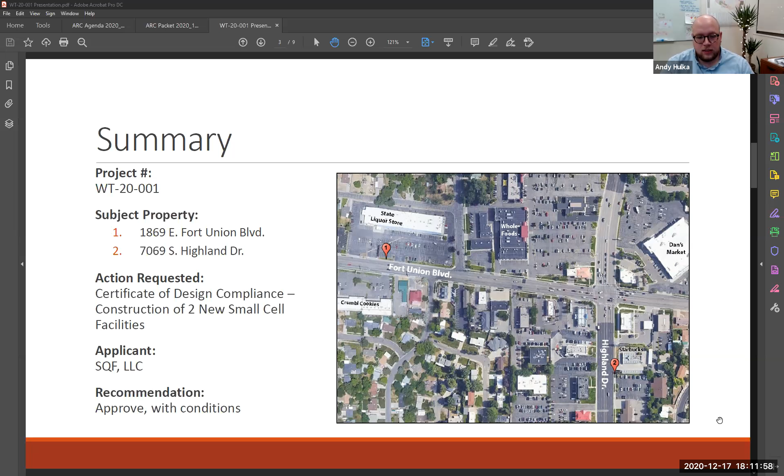To remind you the discussion that we had from last month, these are my notes. Comments were first for staff to review the potential for a small cell and streetlight master plan. That is something that we added to our project list, something that I do think is a great suggestion and something that we need to work on, so we will be proceeding with that. Unfortunately, though, the applications that we've already received before adopting any sort of master plan, we can't hold them to a future plan, but it is something that we do want to work on for all future applications, and we will keep you posted as we do that.

The suggestions that were made by the commission for this application were for the applicant to explore feasibility of redesigning the facilities with a few suggestions: one, to add a decorative base to match the city streetlights; to add a fluted element to the pole; to add an additional light fixture over the sidewalk; and then to include equipment inside the pole rather than outside wherever possible.

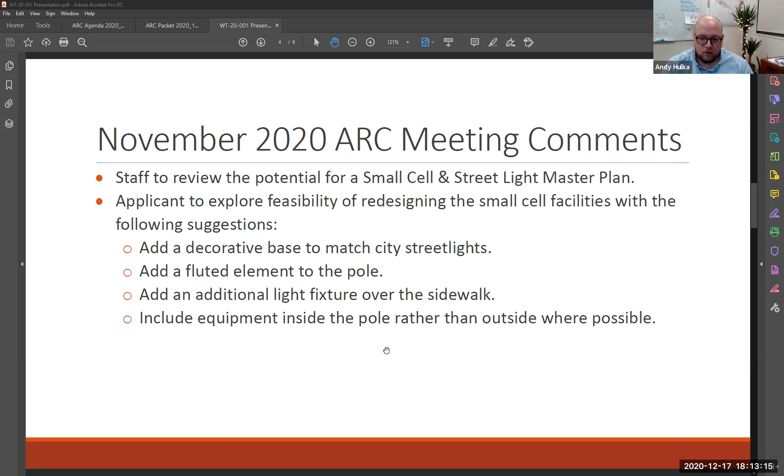So since the last meeting, we've got the two locations. So the first one, 1869 East Fort Union. This one is located behind the sidewalk, so it's just got the one light fixture. There's the comment that the second light fixture doesn't apply in this location, but as you can see, I've tried to highlight the changes that are proposed. So the red circles show what was previously shown on the plans as future antennas. Those have been removed. You can see that that shows a kind of a sleeker pole.

And then in green on the December design, you can see that they've added a decorative base. They are working with our streetlight manufacturers to get one that matches the specs of our current streetlights and get the city logo on it. And then moving to the other location, 7069 South Highland, right out in front of the new Starbucks building. This one, as you can see in red, also some of that additional equipment that was previously shown has been removed. And in the new design, we have a secondary light fixture so that there's one over the street and one over the sidewalk, and then the base again.

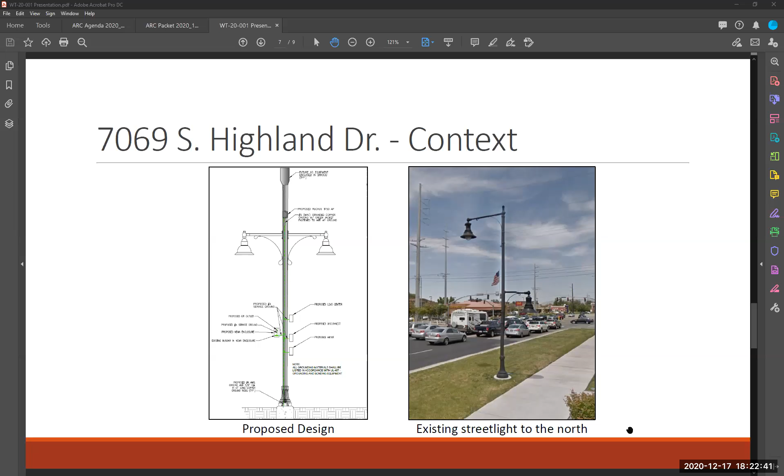I think Andy did a good job summarizing some of the revisions we've made to the project. We added the light to both. Well, we added the second light to this one here at 7069, and then we added the light also on the one on East Fort Union Boulevard.

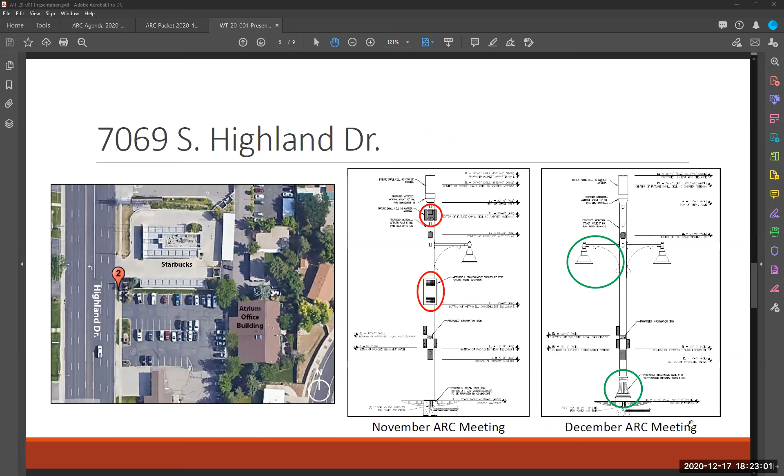Now, why is it better not to have two lights on the other one? Why are we not proposing two on the other one? Is that the question? Yeah. Because the second light is for the sidewalk. So when you're in the parking strip between the street and the sidewalk, it makes sense to have two lights, one for the street, one for the sidewalk. The pole we're proposing on East Fort Union Boulevard has no parking strips, so one light is all you need to get both the sidewalk and the street.

So we're working with Mountain States Lighting on that pole base. I think we have a design, and I sent Andy a PDF showing their Madison base. It's on one of those slides, right? The green one. Yeah, so we'll be able to include that into the design.

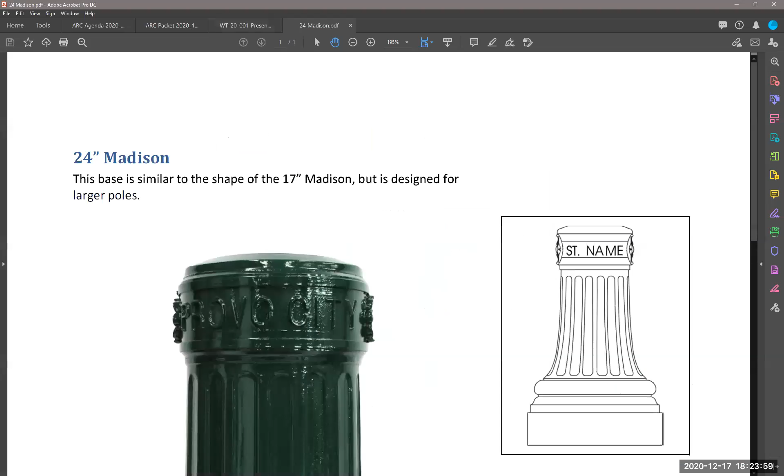And then we removed the future 5G antennas and radio equipment shrouds. Originally we wanted to show that stuff because we're proposing this pole be built to accommodate future co-locators on there, to reduce the total need for new poles in the right of way. But it's become apparent that a future co-locator would need to go back to you guys. So instead of showing some hypothetical antennas and radio equipment shrouds here, we just removed that, and those additions would come to you guys at a later date to review that design, similar to how Extenet had done it at last month's meeting.

Now the pole remains the same. We discussed integrating the equipment within the pole. That would result in a much wider pole. In order to fit the stuff inside the pole, it gets out to 12 inches at least in width, so it becomes a much beefier looking pole to hide everything inside.

It was kind of what I was hearing from you guys at the previous meeting, that you wanted it to look more similar to your street light poles, the decorative street light poles. So we tried to keep the diameter narrower. We're proposing to stay with the same diameter. Mountain States Lighting's pole diameter is narrower, but we wanted to stick with our pole for structural purposes, in order to ensure that it could support the wireless facilities we anticipate on this pole.

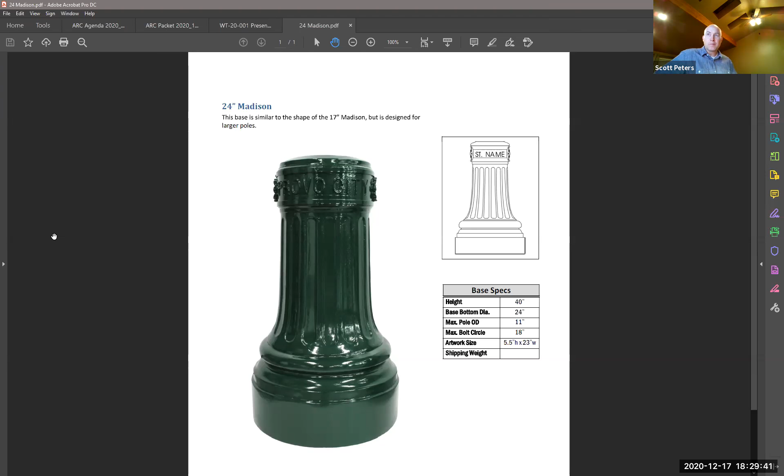So I like having the fluted base with the narrower pole, I don't mind that at all, but what I don't want to see on the pole, I'll be frank, is a bunch of other antennas on the outside of the pole at a future date. I kind of feel like nothing has really changed on this application except we put the fluted base on the bottom of it and added the lights. But as far as the design of the pole, nothing has changed. So I kind of feel like it's a little bit of a shell game, where we're going to show it without all the carriers on it, and then come back and get them to approve it once it's in for all the carriers.

And I would just say, my personal opinion is I'm going to be very resistant to approve a bunch of carriers being put on the posts at a future date, when we could have had a larger pole that would accommodate those inside of the pole and not had it so visually intrusive.

So you would prefer the integrated, like the fatter pole, would be your preference then? If we're going to come back and put a bunch of equipment, I guess the question is, do all those future antennas go inside the pole if it's a fatter pole? Yeah, so there's a canister at the top that would accommodate those antennas, that's what it's designed for.

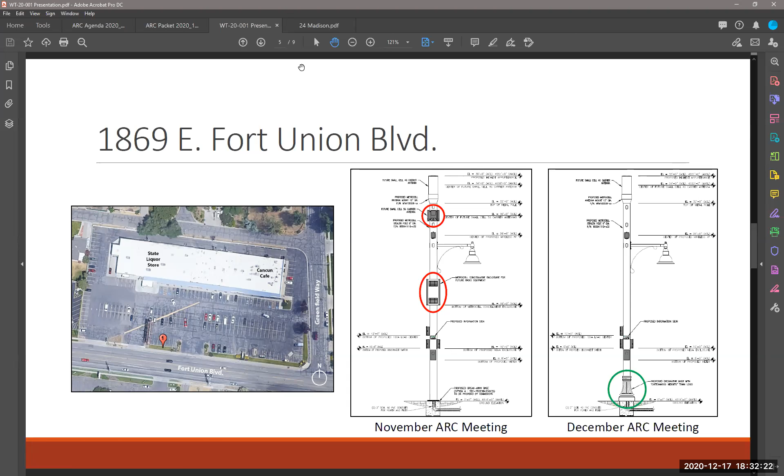I'm trying to see if I can find a plan for one in a different jurisdiction. We'd gone to a different jurisdiction with that pole, and then they didn't like it, they said it was too big. So, I mean, some like it, some don't.

So I can, if you'd like, if I can figure it out, I can try and share my screen. Yeah, I think that I made you a panelist, so I think that will allow you to share. I don't know if he's on the call. Looks like we may have dropped him. I think it muted when I switched over. Are you still there?

Yes, can you hear me? Yes, I'm still here. So there's my video now. I apologize for that.

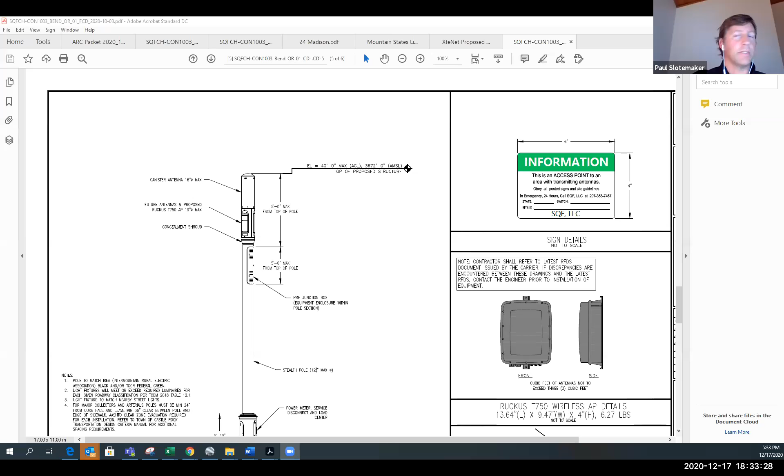You're probably going to hear my dog in the background now. I apologize for that. But can you see where I'm putting my cursor over this pole here?

So this is kind of an integrated style pole where you have the pole base - it sits 5 feet high. Then you have the pole, 12-inch diameter, and then the 16-inch diameter canisters at the top that house the antennas. Then you have the equipment down here, and there's also another equipment area up here, it looks like. Looks like the base on this particular model is a 20-inch diameter base at the bottom here.

There's a different one also, a different style from a different manufacturer. It looks similar to this, but this is kind of what an integrated pole typically looks like. I personally would much rather see an integrated pole like this with the light fixtures on it - I think that would be much more aesthetic and much less industrial than just attaching a bunch of boxes and panels to the pole.

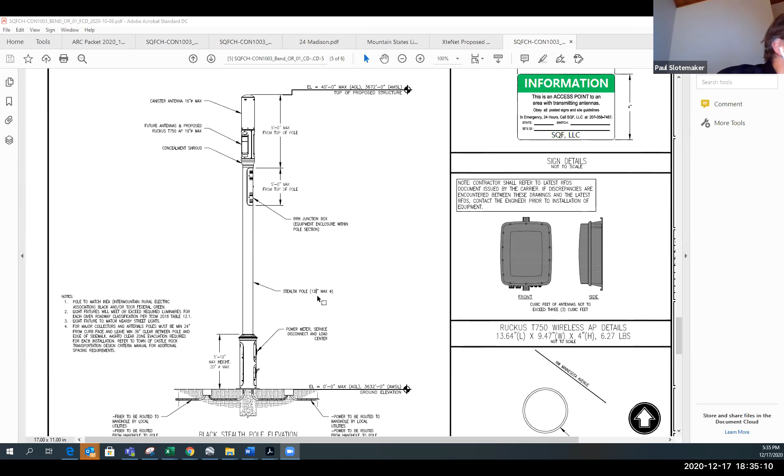I agree. How wide is this pole? 12-inch diameter, perhaps 12 3/4, it looks like - that's this particular model. There's another manufacturer that's probably at 12 inches. I think the dimensions I gave you earlier came from a different manufacturer, but it looks similar to this. We'd probably go with the other one - there's a different pole that looks similar to this we'd probably go with. This is for concepts, just to show you what they look like.

So the top of the base, it looks like there's some architectural detailing in that, like a cap that then tapers down. Is that what we're talking about? No, the top of the base - bottom of the pole. Yeah, okay, sorry. And I think that little bit of detail adds a lot.

Yeah, they do design these, they try to make them look all right. So-

It was my understanding that you guys wanted to be more like your decorative lights, the narrower poles, and this just gets wider. So we thought we would strike a balance and go with the 8-inch diameter pole we were proposing. I'll remind the commission members that with only 3 of us at the meeting, we need a unanimous vote to approve something, so we probably ought to have enough discussion that when a motion is made, we're all on board with it.

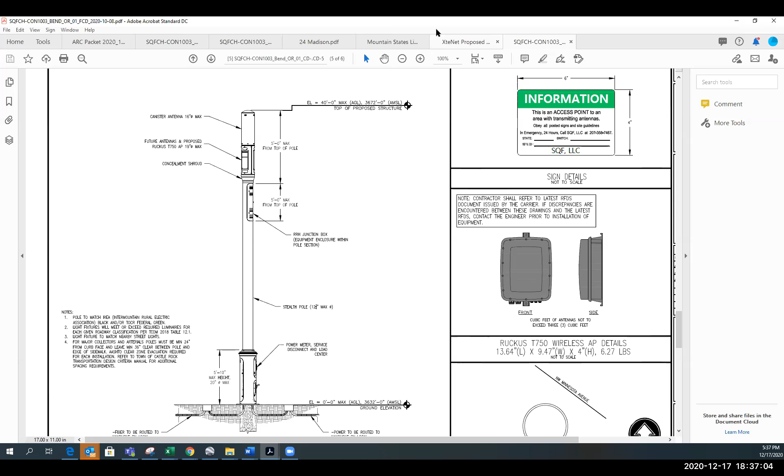Okay. What are your thoughts, Steve? I'm thinking that the 12 inches and a 20-inch base is a different animal than a light pole.

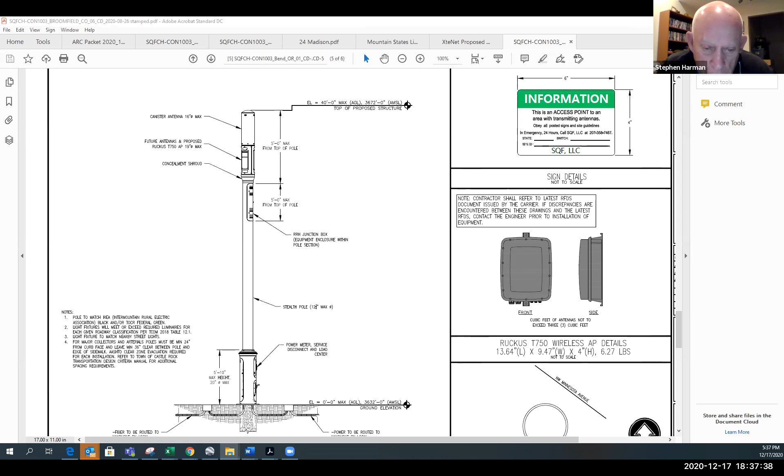So my feeling is, if it's a choice of whether you want the small one with equipment on it - I agree that I would prefer seeing this, even though it doesn't have the city's fluted base on it, it's still going to have a substantial base. And if the base ends up fluted at the top into the pole so it looks proper, I'd probably approve that, because I think it's better to have that stuff inside.

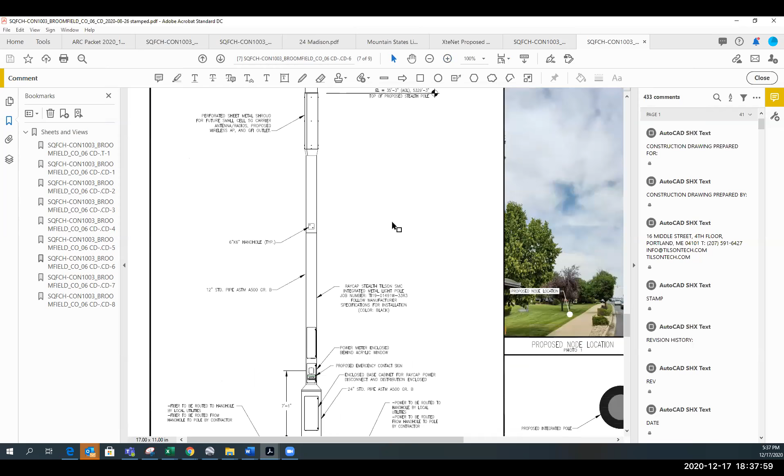I agree with that. And we can still put the light fixture hanging off the side, Paul. Yeah, I know you can do that, I've seen lights. This is the other pole, by the way. I like that one better. I do too. And this is SQF's preferred integrated pole if they were to do one.

So I'm glad you like it better, but they have attached lights - typically you'll see a Cobra style light attached. That's what I've seen. Now, I know you have your decorative style light - I'd have to ask, I'd have to find out if it's engineered to support something like that.

So I would support this type of pole with the city's decorative light that is consistent with the city's design on the pole. That would be my preference, with it painted black so it looks like a thick light pole. This pole's tall, and so the 12 inches doesn't bother me as much because the height of the pole is so high.

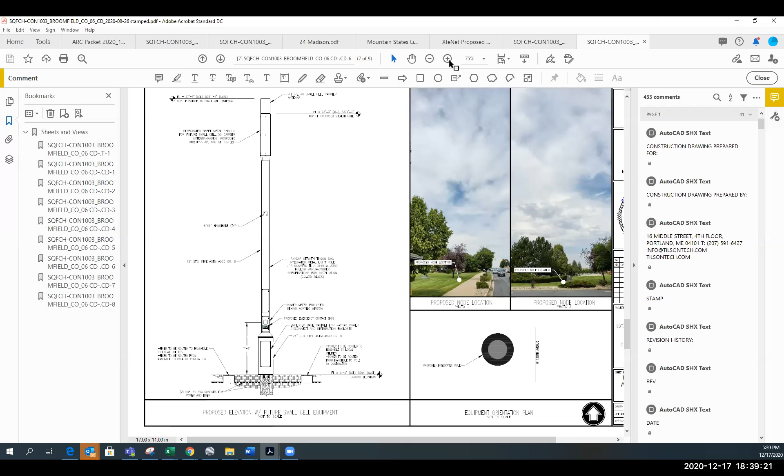Now, does that have a bigger shroud at the top? It looks like a taller shroud. I'm not sure if it calls out the same detail as the previous pole. So this is a 12-inch diameter pole - it does flare out. I don't know the actual dimension of this, but it's probably similar to the 16 inches, probably an industry standard to be able to fit the antennas in.

I apologize, my wife's on a call too.

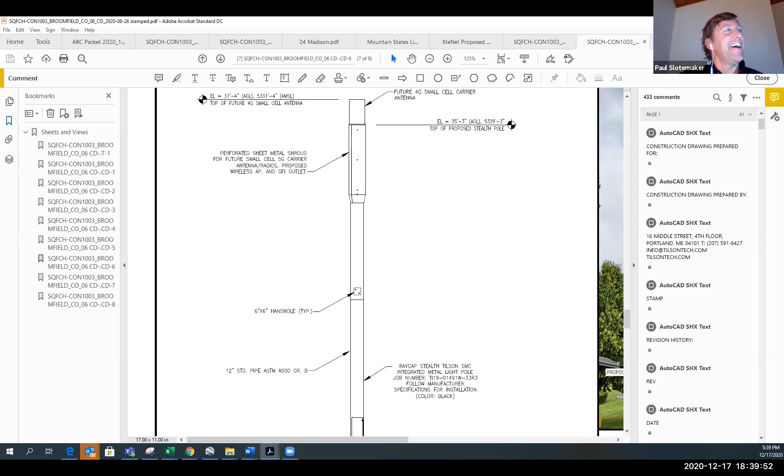Hey, Eli, we understand, it's been a busy night here. Sorry about that. I thought I was muted when I yelled there.

24-inch base here, it looks like. Trying to get the piano to stop.

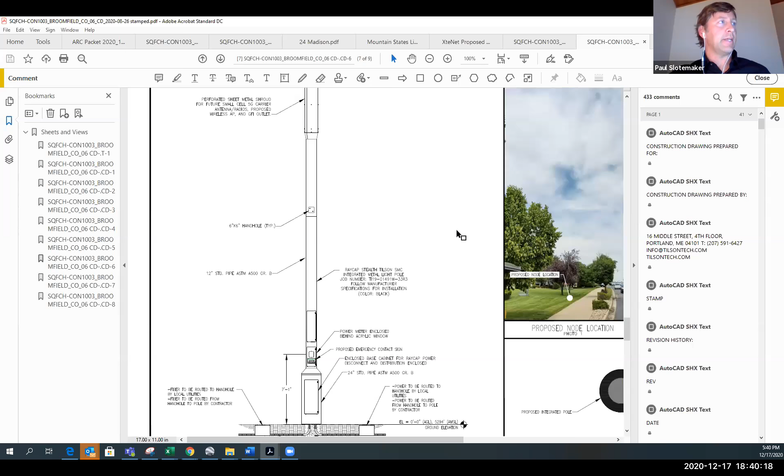I'm not sure if this is something we've done elsewhere. I'll have to check with the folks back at SQF to see if this is something they could do at this location.

Does anybody have any more questions or discussion? I would like to see a motion that we approve it with this pole and the decorative lights, painted black to match the city standard.

Now, if it turns out that we can't attach a light for whatever reason, structural reasons, is that something that could be accepted, or what sort of wiggle room do we have there?

I personally think the light is really important. That's the thing that takes it away from being an industrial pole to being something that is part of the urban vernacular.

Yeah, I think I agree with that too. I think you probably have to come back if we can't get a light. So if we were to approve it with those lights and then it turns out for whatever reason the lights are a problem, we'd have to come back to you guys. Is that how it works?

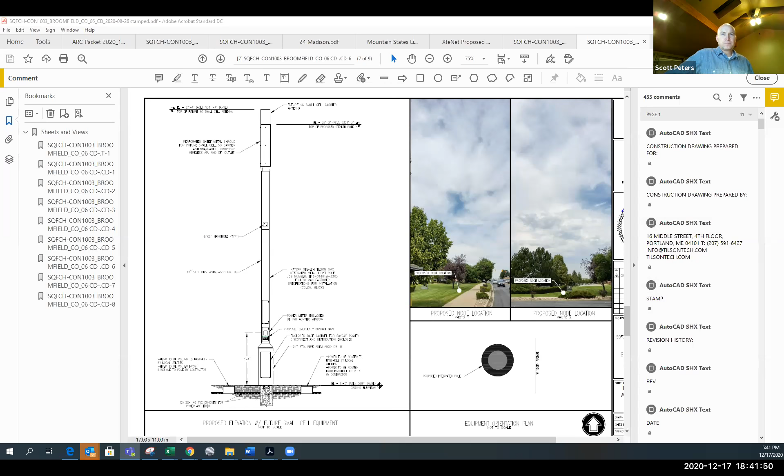Yeah, I think so. I hate to do that, but yes, I think that would be a modification to what was approved, and we'd consider that a significant change, so bring it back to the commission for review.

So do you need a motion for that? I do. I need one of you to provide a motion and the other to give a second.

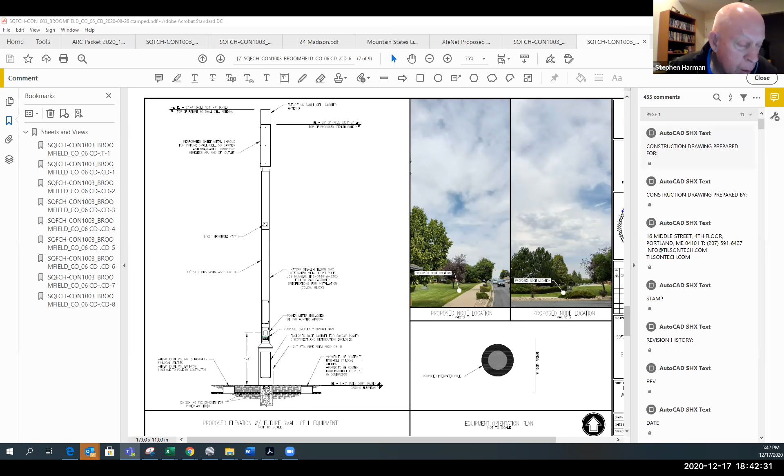I'll make it. I move to issue, how would you call it, a request to... there's some language, can you pull that up, Andy? Sure, let me switch out, sorry about that.

I've got some language, but it's for approval. Well, I would recommend that we make a motion to approve it with the stipulation. I move to issue a certificate of design compliance for project WT-20-001,

subject to the recommendations discussed, that it incorporates streetlights as outlined by our discussion today, and then bring it back to us in the next meeting in January.

So Steve, for clarification, are you talking about the motion would be the 12-inch pole with the equipment integrated inside the pole and the 24-inch base feature? Yes, I should have added that.

And are you also stipulating that it must be painted with a textured black paint to match the city streetlights? Yeah, that's more specific. I was sort of thinking that the recommendation of the conditions would cover that, but yes, it needs to be black. It needs to be all of those things that we've talked about.

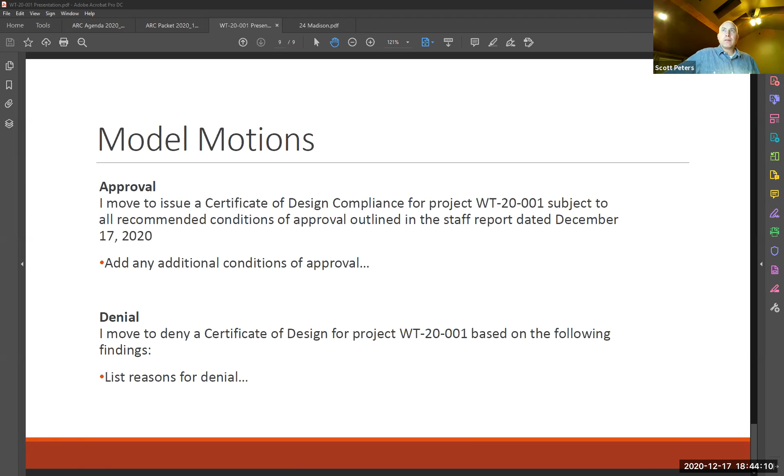So the first staff recommendation indicates that the pole would include the city logo, and I don't know if that's something they can do on that pole. I would think you'd have to not require that. I think that's right, and I think if the city wants that badly, they can put a plaque on it.

Okay, and then I'm assuming you're specifying that it's the city's streetlights as identified by staff? Correct. And then they need to obtain a building permit and right-of-way permit from the city.

Correct. Okay, so you mentioned bringing it back in January. I'm assuming we're not doing that if they follow those conditions, we could approve it without a follow-up. Okay, amend that. I think that's correct.

Okay, let me restate what I understand. So we have a motion to issue a certificate of design compliance for the project using a 12-inch pole with a 24-inch base as presented by the applicant. It would be painted black with a textured black paint to match the city streetlights, use the street lighting as identified in the recommendations, and they would need to obtain a building permit and right-of-way permit from the city for each location prior to construction.

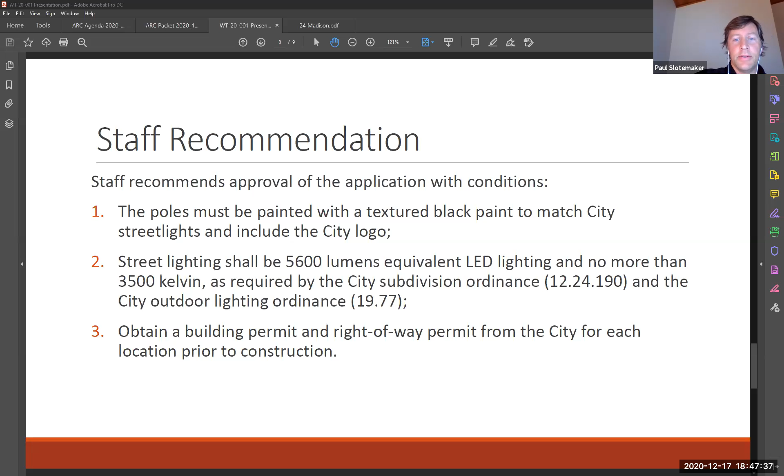Let me share the screen here. You cannot start screen share while the other... okay, go ahead. Share. Okay, I was just gonna clean up some of this stuff here. Let me zoom in once or twice. And of course the pole heights, they may stay at these pole heights. I'm not sure how much leeway they have in the pole heights. They could probably modify it to get to what we're proposing. The share is still not showing for me. It's not showing, okay. Oh, I need to click right down here. Okay, is that working now? Yes, yes.

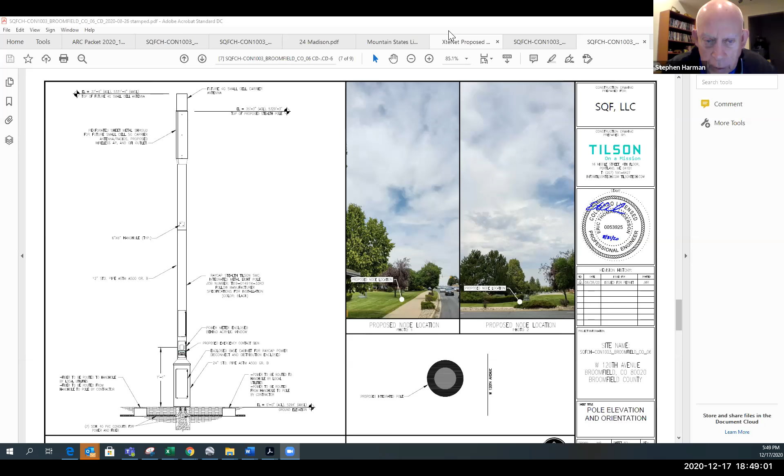So does that summarize your motion, Steve? We put those things in there. Yeah, I think so. I think that does, because the bigger pole houses the equipment, and that was the reason to go to the bigger pole. I don't think that needs to be stated. That's been stated, and we mean 12 inches by that. Right, mm-hmm.

I second the motion. Okay, we have a motion and we have a second. All in favor? Aye. Any opposed? So the motion carries unanimously.

Thank you very much, really appreciate you coming in and working with us on that. Thank you, Paul, sorry it's so difficult. Yeah, I appreciate you guys' time on this and working on it too. I'll talk to the folks at SQF, hopefully they can get those lights on there like you liked. That'd be great. Commissioners, can I ask one point of clarification before we move on?

I just want to make sure we get the right information when I type this up, but we want the lights to match the city specs. You were okay with having the two lights on the Highland Drive location, both at the same height? I am, yeah. Okay, so then we will go with that, and the one light fixture on the Fort Union. Okay. Any other questions? I think I've got everything. Thanks. Okay, great, thank you.